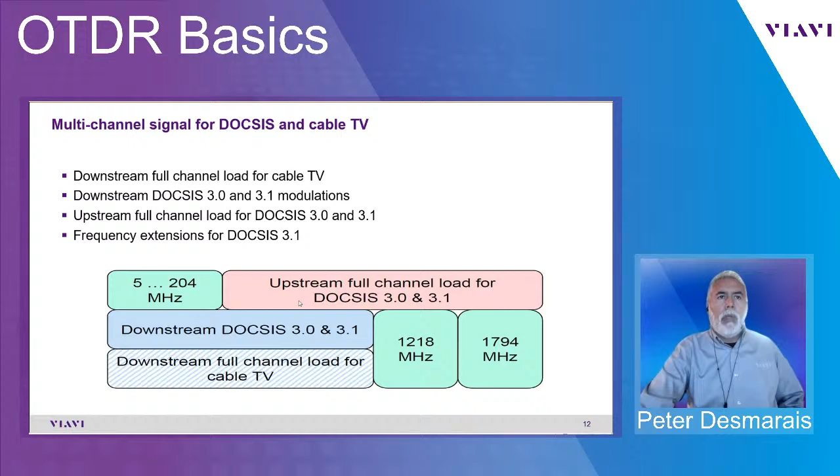Here's just an example of the downstream. When we look at the downstream, for example, we could see DOCSIS. We went from analog to digital, and from digital to single QAM carriers, as well as OFDM carriers. And now I am starting to work with systems who are deploying nothing but DOCSIS carriers and no more digital video carriers. So the network will vary based on what they've deployed.

As well as for the upstream. We went from, for example, single QAM carriers to carriers used for the set-top boxes, as well as to the deployment of an OFDM carrier, including the exclusion zones. So the systems will vary in bandwidth on the upstream as well as the downstream, as well as the variations of all the different types of carriers that we may be utilizing.

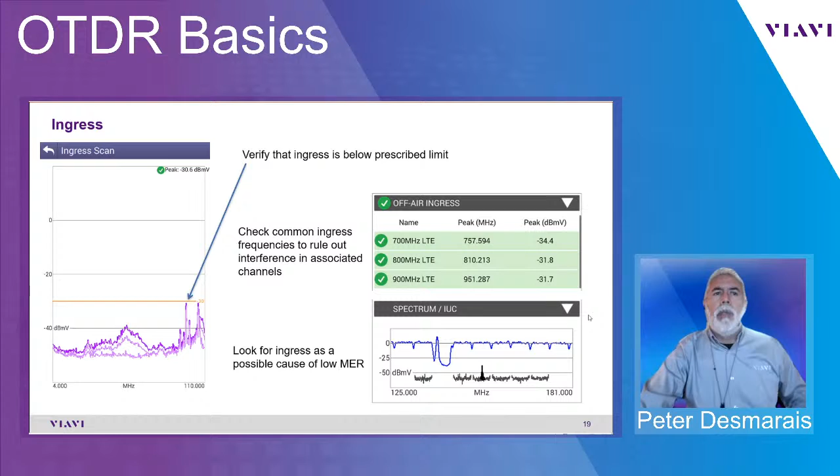So for DOCSIS 3.0, what we can do is a One Check. The One Check is one test that automatically verifies the upstream ingress, again, at each location, whether the tap, the ground block, or the CPE. We also have an Ingress Expert for the network, so they can verify whether it be at the head end or in the network, at the optical node, or the trunk amplifier, line extender, etc., or the tap.

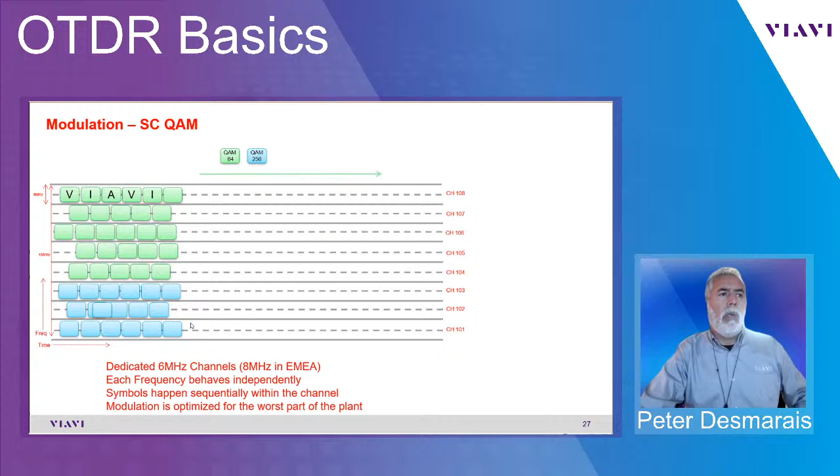As the data comes in on each individual carrier, it's coming in serially. As we went from DOCSIS 2.0 to 3.0, we started combining carriers and sending data, but each carrier is still sending the information serially, on a per carrier basis. In North America, we use 6 megahertz. In Europe, they use an 8 megahertz carrier. Each frequency behaves independently. In this example, they could be all 256, or a combination of 256 and 64 QAM carriers. It is backwards compatible, but it's basically the delivery of the information.

Here's an example of a single QAM carrier, with ingress and with no ingress. This is what we want: great dynamic range. You can see the difference in an OFDM carrier, and on an upstream when we have a single QAM carrier and an OFDMA carrier with an exclusion zone. We overlay the set-top box in this example, so you can see the difference between a single QAM carrier and an OFDM carrier.

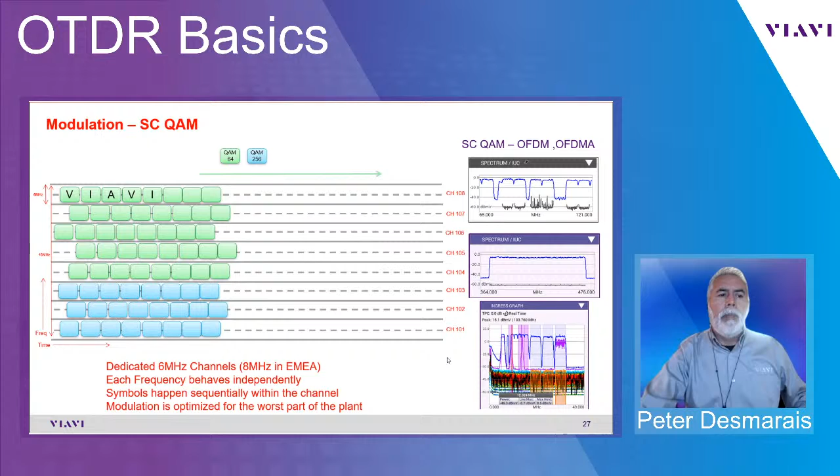So when we talk about the modulation and separation of every subcarrier, for example, instead of being 6 megahertz, the system can either be 25 or 50 kilohertz subcarrier spacing. Again, the bandwidth of the carrier can vary. Most systems deployed initially a 92 meg carrier, 96 meg carrier, and then they went up higher in bandwidth, but it can be all the way up to 192 megahertz.

So in this example, we see how each individual subcarrier can have different types of modulation to carry the actual data. So this example is really just one symbol, or a group of subcarriers to deliver the content, and then the next carrier and the next group of carriers. As each individual subcarrier is delivering the data, it can be changing in modulation, and that modulation can possibly be between 64 and 256 QAM, 1K, 4K modulation.

All right. So this example here has the spacing set to 25 kilohertz. Most systems in North America deployed a 50 kilohertz spacing of these subcarriers. Now they could deploy at 25 kilohertz, therefore we'll have more subcarriers and therefore higher performance as well. So for right now, in most systems in North America, the spacing is at 50 kilohertz.

All right. The demodulation is an FFT, fast Fourier transform. Based on the time, synchronization is very critical. So this is the reason why we want to verify linear distortions and those type of things that can impact an FFT. We also want to verify code word errors.

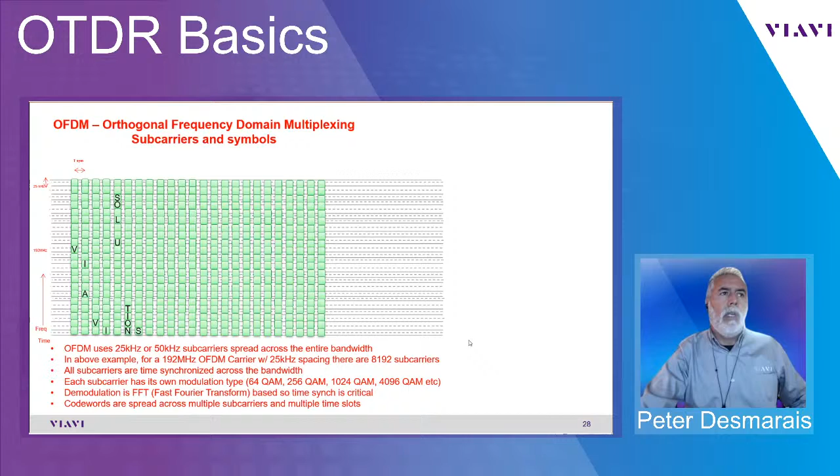So one of the things that's going to change, instead of looking at MER and BER, for example, from a code word perspective, since we're looking at so many carriers being deployed, we can have ingress and noise and linear distortions and other things affecting code word errors at each group. So we have to be able to verify code word errors across this entire symbol rate. That changes as opposed to a single QAM carrier where we verify MER across only 6 megahertz.

So here's an example of this. This will make more sense later as we go through it. When we look at a single QAM carrier, we look at level, MER, pre and post BER, right? But when we look at an OFDM carrier, we have to be able to look at code word errors. And code word errors start at the lower part of the frequency band. So if you remember, this is the lower part of the frequency band, where ingress noise can impact this, and then they populate upward in frequency.

The next code word pointer starts at the higher frequencies and populates downward. So in this example, if we have noise or ingress, they can impact the ability to lock into the next code word pointer. So you have to verify this. That's the reason we have the ability to look for ingress underneath the carriers themselves. So this is an example of how the data is being populated. On a subcarrier basis, we're actually demodulating the entire broadband for you to look for those types of distortions.

Okay, so modulation can vary with an OFDM carrier, right? So we can't just have all of the subcarriers broadcast at one time. So what we do is stagger the information. You can see how the phase changes. One group of subcarriers comes in, the next group of subcarriers comes in, and then the next group and the next group in order to deliver that.

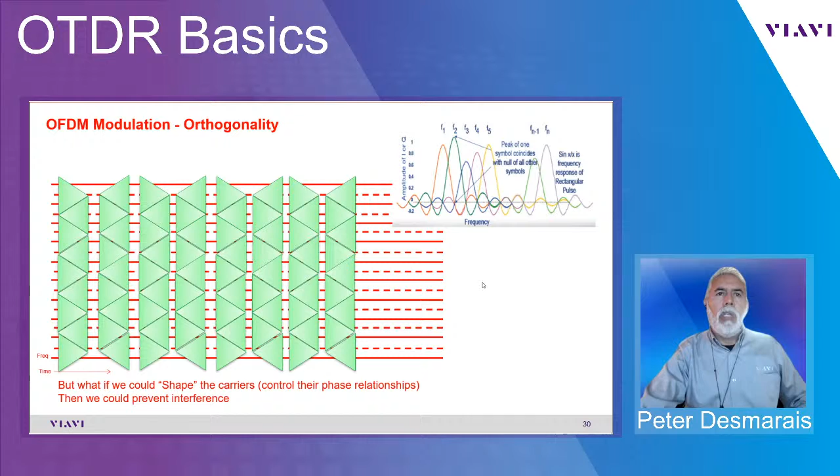All right, so another thing in an OFDM carrier is what we call exclusions. Exclusions are sometimes what happens when we have all of the subcarriers. We may have various different anomalies. Sometimes some systems deploy an OFDM carrier in the LTE band and those type of things. So you can actually have what they call exclusion zones. This is different than what we had in a single QAM carrier.

Right? Here's an example. Sometimes maybe you have anomalies, or maybe you have a carrier. Some systems out here in North America do have a specific channel and they can't move it, so they need to create exclusions to basically format the OFDM carrier around a specific carrier that they cannot delete because they have legacy equipment out and they cannot remove that legacy carrier itself. So exclusions are being used on the downstream, and exclusions are certainly being used on the upstream as well.

So this is why I'm basically nulling the subcarriers and not sending any data on these type of carriers in order to make sure we do not affect any other services, or maybe you have excessive ingress, those type of things. But in most cases, it's due to a legacy carrier that is being utilized at that particular frequency.

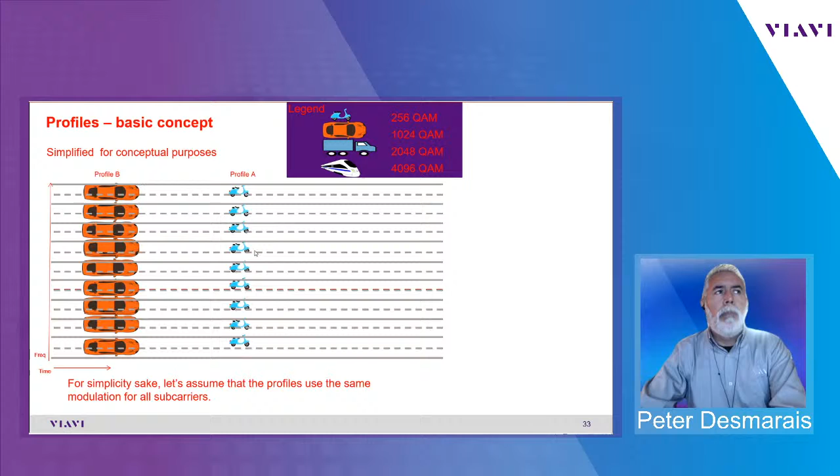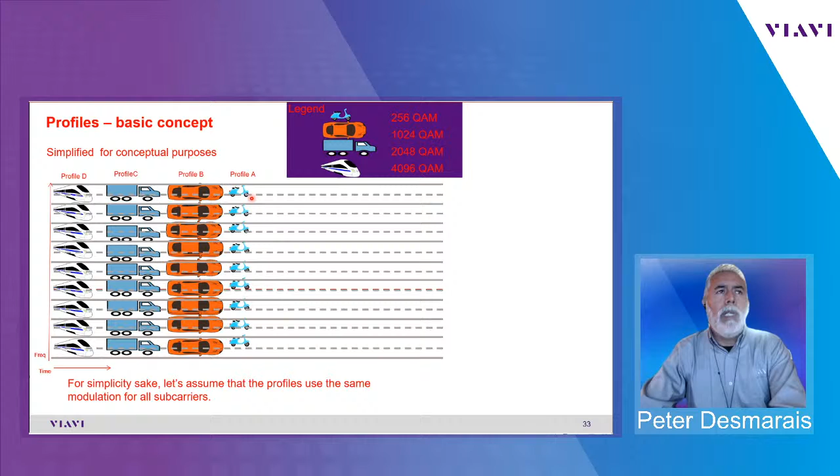The next example is the B profile, and then the Charlie profile, and then the Delta profile. You can see the different types of modulation that we're using. So in this real basic example, the entire A profile is basically at 256. It could be 64 QAM, it could be 256, it could be 16 QAM. There are variations.

And then the B profile, the Charlie, and the Delta profile can increase the bandwidth, or I should say, increase the modulation. Therefore, in the same location where you broadcast a 256 QAM, now all of a sudden it's being broadcast a 4K QAM, and this is what's changing the dynamics. We couldn't do that with a traditional single QAM carrier.

We can't just go back, deploy it in a downstream 64 and go back to 256 and go back and forth. Set-top boxes and cable modems are not used to this ability, but in the OFDM world, we have this ability to switch on the fly. Each individual carrier can meet that type of modulation required. So there's a constant communication between the CMTS and the modem to see if there's any problem deploying.

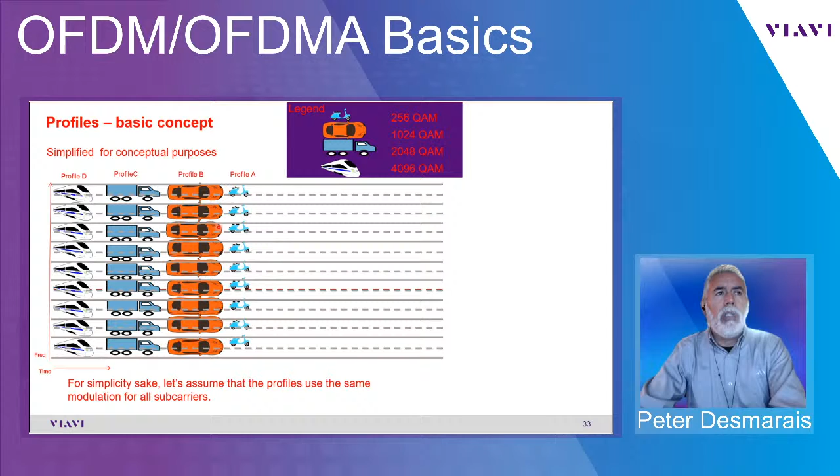If my understanding is correct, Dave, correct me if I'm wrong, you can have up to 16 profiles delivered to that. Most systems in North America deployed about 2 to 3 profiles, maybe some deploy 4, but there are variations, and that profile can vary with different types of modulation.

Okay, so again, this is an example of us helping with the ONX and showing you the max modulation. We show you the A and the B profile, and we'll talk about the next codeword pointer as we go forward. But this is the max modulation, meaning that this is the max modulation that they're deploying at that profile, and therefore it could be lower as well. All right. Usually it's common to have the Charlie or the Delta profiles deploy 4K modulation.

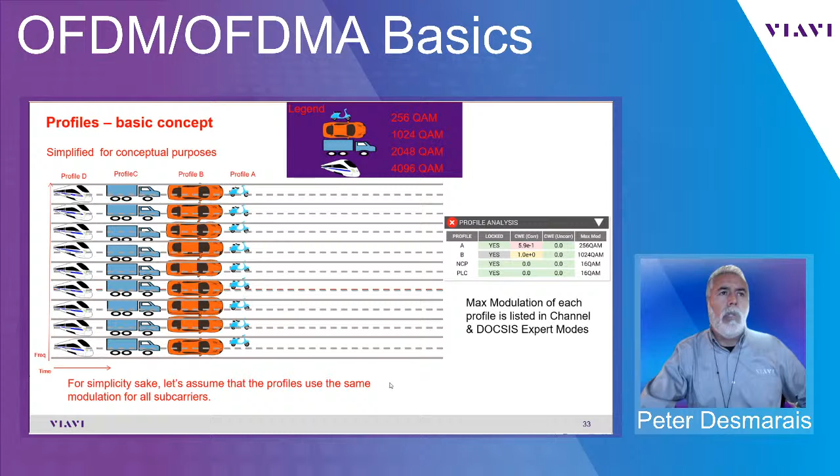Some systems increase the bandwidth of the carrier. Instead of having a 96, they'll do 110 meg, and they'll just do 2K modulation across the band and not deal with 4K, depending on the types of problems the network has in the area, etc. So there's a lot of latitude for networks to deploy various types of modulations and bandwidths and profiles.

So testing the building blocks of an OFDM carrier, so we can understand which are the blocks that we need to test for, and why we need to test each category. A lot of times when I'm doing these types of trainings, people say, well, why is the PLC so important? Why isn't level and power important? Well, we'll see that the difference is because of the type of modulation that we're seeing. So the first example is the PLC, known as the PHY link channel, which contains the critical signal decoding information, right? So this is really important.

If I cannot detect this carrier due to linear distortions or excessive noise at that particular frequency, I won't be able to get the rest of this upper part of the requirements, like the next code pointer, right? The next code pointer tells the modem which code words are present in which profile to find each code word coordinate.

So if I was to go back a couple slides, and we were talking about all the symbols and going at each individual, all these code words are broken down into different areas. So the next code word pointer tells exactly where that group of traffic of code words are for that particular modem. So this is very, very important.

The A profile is the boot profile. It's kind of like booting up your PC and identifying all of the others, kind of like keyboard and mouse, et cetera. So it's very, very important to capture this information as well. All systems must be able to use the A profile. All right. Variable bit loading is available to all of these that we talked about earlier.

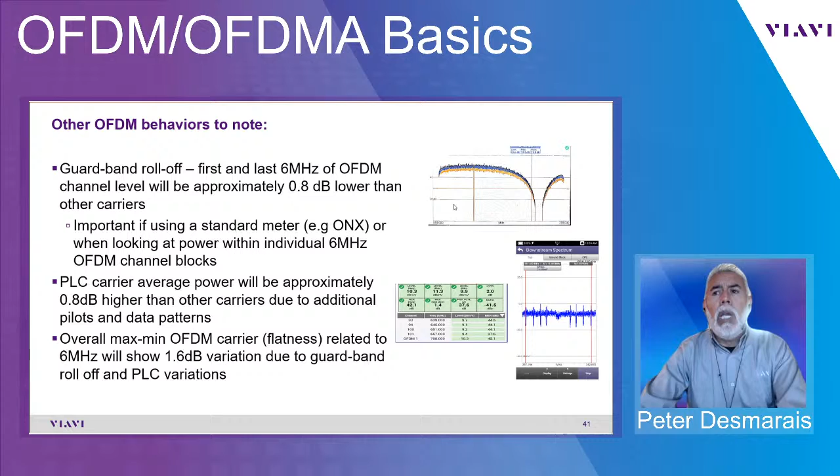Again, the guard band, other behaviors to look at. Here's the guard band, for example, right? So the guard band is up here. If we look at the carrier of an OFDM carrier, and then for systems that deploy exclusion zones, you can see exactly what happens to all of the subcarriers. They drop not only in level, but they drop in MER and those type of things. So you may have to change your parameters for passing or failing your exclusion.

If you remember, we looked at 2%. You wouldn't be able to use 2% here because of what's going on with exclusion zones. So if using the standard on the ONX, make sure that the settings are set for passing or failing. The PLC is 0.8 dB higher than the other subcarriers in the carrier due to the additional pilots, so what they're saying here is that the amplitude is increased because of the subcarriers.

This is an example of using the ONX on the spectrum, looking at the subcarriers, you can see the amplitude. So in this portion of the spectrum, when we look at the actual power of the measurement itself, it's going to increase in power, and therefore there's a difference in power across the 192 megahertz carrier.

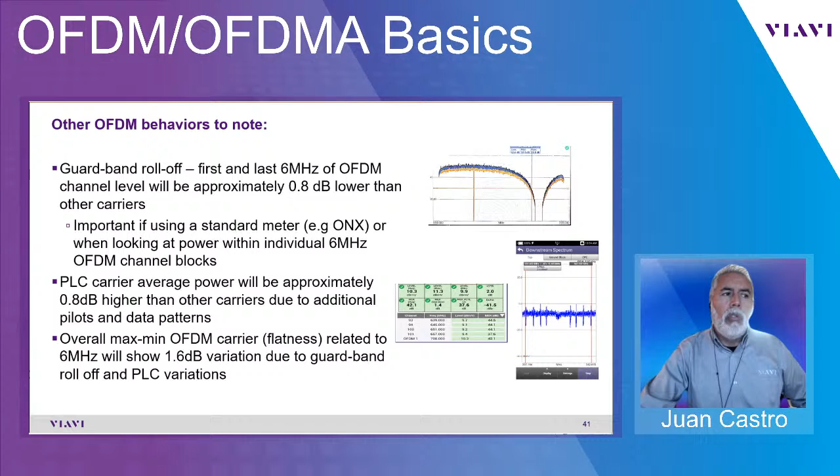All right. From a flatness perspective, again, depending on the exclusion zones and no exclusion, those type of things, we want to verify the ICFR of the carrier itself as well, right? We verify this on a single QAM carrier, but across a 192 megahertz carrier, we're taking the worst case scenario of 6 megahertz, for example, right? Or if we average the power of 1.6. So again, that's what we're looking at right there. The worst case scenario, since we're breaking the OFDM carrier on the downstream to 6 megahertz response.

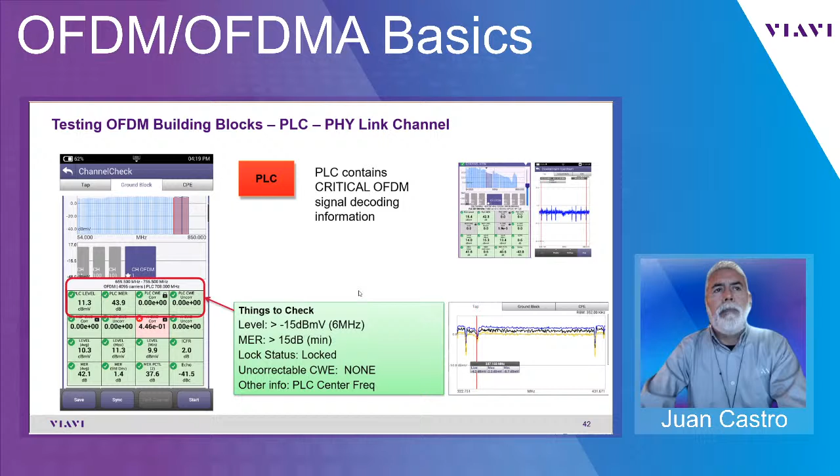The next up here is the next codeword pointer. Again, the next codeword pointer. We want to verify correctable and uncorrectable. Remember, the next codeword pointer starts at the upper part of the frequency, and they populate downward, right? Codewords start at the lower part of the frequency, and they populate upward. So again, we want to make sure that we have no uncorrectable, and we want to make sure we have a lock status. Because of time, again, this will vary. It's just an example of that.

Again, we want to verify because we look at it right out here and we bring that information out again for the next codeword pointer and the PLC. And you can see the type of modulation that we're using. Very robust, right? The next one is the A profile. It's not uncommon to have correctables here, but what we don't want is really any uncorrectables at this point. And it can impact the A profile. This is the boot profile. It's really recommended for all modems to capture that information. You could have errors across all the other profiles as well, and they can be corrected. So again, we want to make sure that we're locked into that.

The next thing we have is the level average. Since the carrier can be 192 megahertz wide, we have to average that over 6 meg. So we have a maximum, we have an average, and we have a minimum power level. So again, generally the level recommended for this is greater than -6, right? And the reason for that is that if the level starts to drop, just like we did with single QAM carriers, the performance will become lower, and we won't be able to meet the requirements for both level and MER in order to receive 1K or 2K or 4K type of modulation.

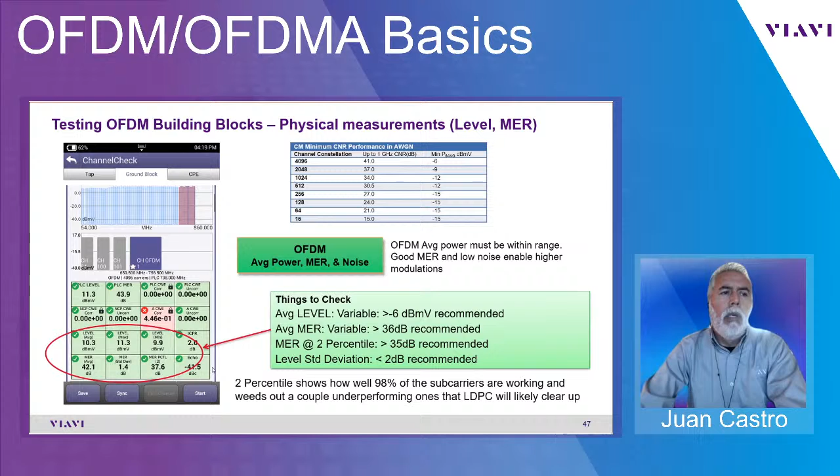Other things that we want to look at is when we verify the tap and the ground block. Just an example: if the tap and the profiles are working accordingly, and then we move on to the ground block and there's some type of noise, ingress or level problems, you can start to see, as we go from the ground block to the CPE, that we start to lose the profiles, and therefore the ability to do the throughput that is required for that customer. This is really no different when we do the actual network itself.

So the profiles are very important to look at to make sure that we are capturing the data and that we have no uncorrectables. Once we move into uncorrectables, the data may have to be rebroadcast again. And if that continues, you may start to lose the profiles as you move from one point to the next, whether in the network, from the tap to the ground block, or the CPE.

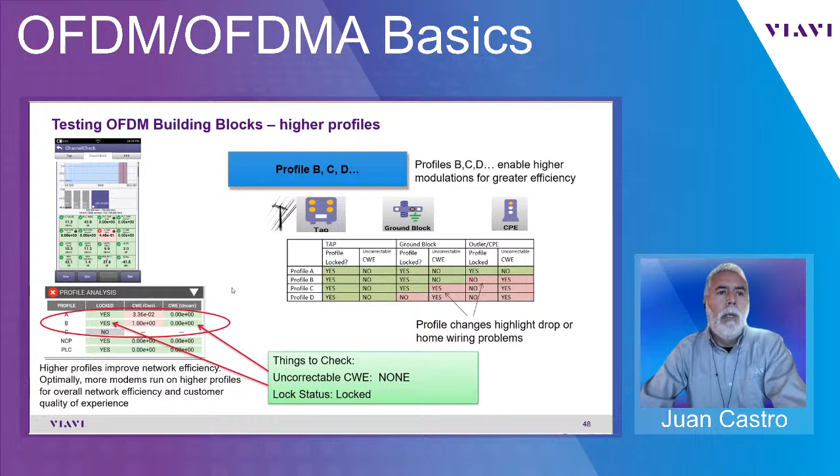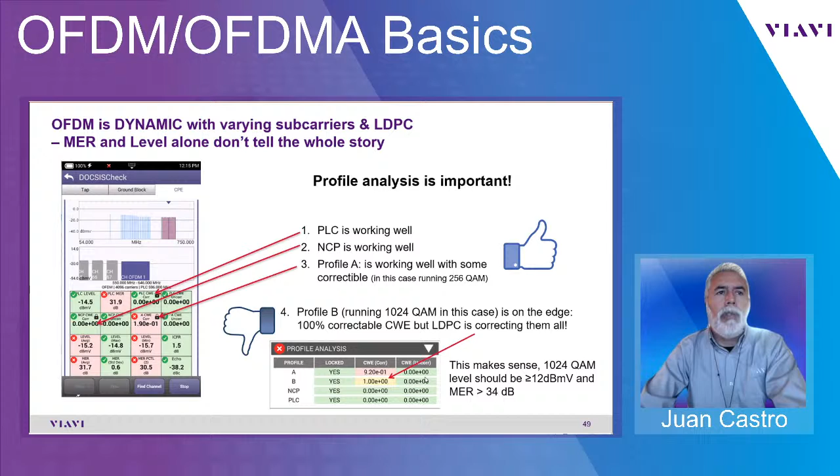So again, very quick: green pass, red fail. Look at the PLC, look at all of the information that we just talked about, and make sure that we have no uncorrectables in order to support the different profiles for the different types of modulations. Again, verify that there is no ingress based on all the different profiles, and remember how it starts profiling from the low end frequency to the high, and from the high frequency to the lower frequency. So always look for the roll-offs and suck-outs and any ingress affecting that particular carrier.

Again, here's everything that we've covered today and what's expected for each part of the building block: the PLC, the next codeword pointer, the profile ID, the average power, and the profiles themselves.

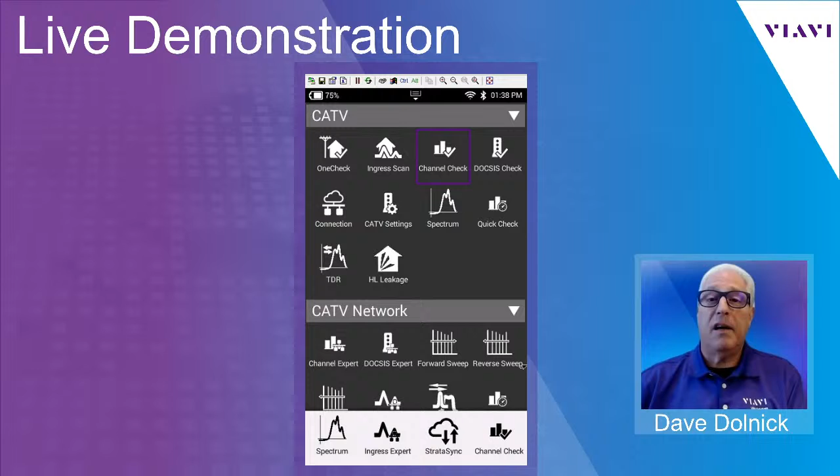So I'm going to go into the channel check application over here. As we just verified, we had signal connected there. That's why I was looking at the spectrum. So I will launch this application over here. And like all good demos, it always takes a minute or two to start.

I'm going to create a new work order ID. And today I'm just going to use something very simple like test new. All right, so I will hit enter on my meter over here to create that new job. So it clears the results of the previous measurements over here. And I will start the measurement over here on my meter. So the CPE is the wall outlet, which feeds normally my set-top box and actually a 1682 ERS router as well.

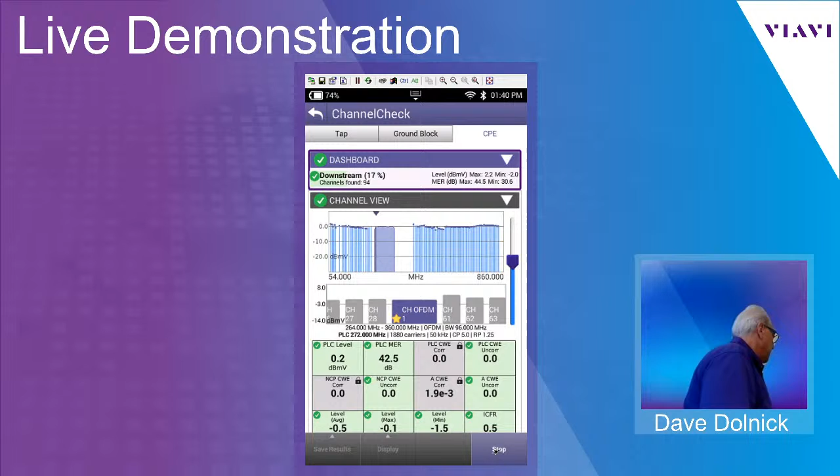David, if you have any questions, if they're pertinent, while this thing is making measurements here, I'd be happy to answer any of those. Yeah, we have a question again from Craig Stanziano. Which attributes of the HFC is the most critical to achieving maximum throughput? Minimize trunk coaxial run lengths, limit amplifier cascades, or ingress? Noise, ingress.

Everything that affects copper plants, it really doesn't matter truly what the payload is, whether it's analog, black and white television, or it's OFDM or whatever we come up with in the future. As long as we have an HFC plant, meaning that we have copper in the plant, we're still going to be exposed to things like radial cracks in the cable, splices that go bad, loose connection points that allow noise to backfeed and ingress into the network. And when it happens, of course, that reduces our separation of the noise floor. Ultimately, that affects the MER.

And when you have reduced MER, that limits the type of services that I can deploy in that part of the spectrum. Certainly very applicable to the OFDM channel. And that's the one thing we need to think about, because as we deploy OFDM in different parts of the spectrum within our network, we have to look at the effects that those off-air service carriers may inject and create issues with quality of service.

So now, looking at this live measurement over here, we're not yet at 100%, but we're looking at the OFDM carrier. We can clearly see here, it says that it starts here at 264 megahertz and goes to 360. There was a moment in time up to literally 6 months ago, maybe even less, where the OFDM carrier was at the top part of the spectrum over here, right there in the LTE band, which unfortunately meant that a lot of people in my area simply could not get the higher level of service, that profile C that my operator uses, which is the 4K service. That provides the 1 gig capability into the subscriber's home.

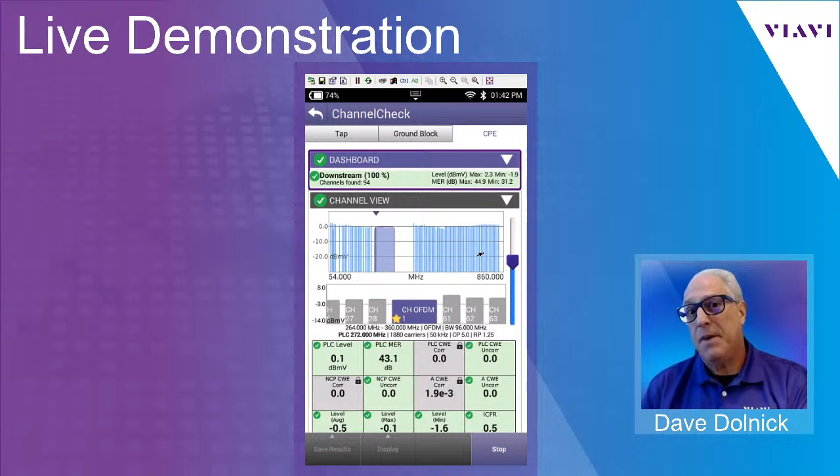So there are different ways of getting around that. We certainly mentioned before the availability to create exclusion zones where we eliminate those off-air cellular carriers from being utilized by the OFDM channel. That's one way of doing it. One of the other things that's important, and this is probably even more important in the upstream of OFDMA, is the profiles that we build.

When we're trying to stick in OFDMA in the upstream in between two active channels, if we're anywhere near an off-air cellular or paging provider that operates within the band of our OFDM channel on the downstream or on the OFDMA channel on the upstream, we have to limit the profiles. If we set the highest level of profiles across all the subcarriers in the part of the spectrum where I have diminished quality of service, meaning a high noise floor, a low MER number, I cannot ever achieve those higher profiles. And that will affect what we actually see when we run throughput tests on the ONX meter. So it's always smart to make sure that we build the profiles correctly. We must always by DOCSIS spec and CableLabs spec build them in ascending order.

So that's the lowest profile, which requires the lowest MER. And as the MER improves, I can request those higher levels of service. If I request a higher level of service right away and I have diminished service quality, things simply aren't going to work. So profile and exclusion zones are very, very important when we talk about building those profiles into the CMTS.

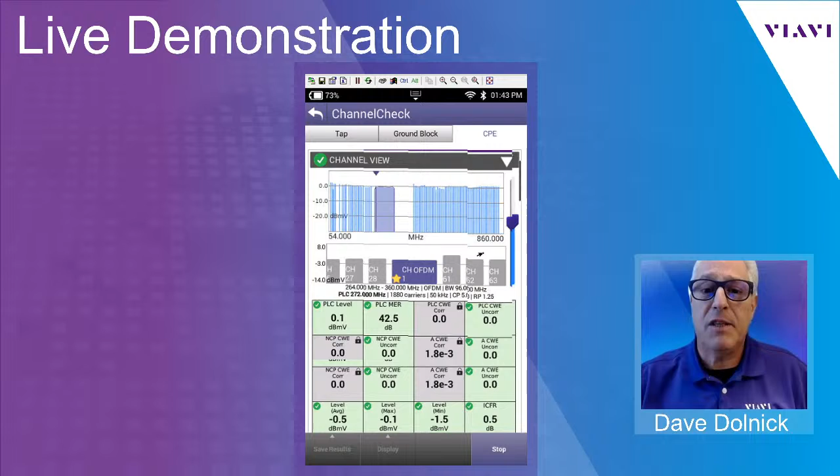So here we're looking at the OFDM channel over here. We see the start and stop of the channel, 264 to 360. So that tells me it's a bandwidth of 96 megahertz, which is a typical bandwidth that I see here in North America. The channels are generally added in 6 megahertz blocks because we measure in 6 megahertz blocks. So if I were going to add more bandwidth to this channel, maybe go to 102 or 108 megahertz, that would simply add more subcarriers for me to utilize.

Now, it tells me here that the PLC is at 272 megahertz. So that's basically 8 megahertz into the input of the channel. And an obvious reason for placing the PLC in the beginning of the channel is as we go higher in frequency, we have greater attenuation on the copper part of the plant. So to make it more robust and easier for the 3.1 device to lock on to the PLC, that physical link channel, or what I like to think of as the primary link channel, because this is the frequency that all 3.1 devices must tune to come online and become active.

So here we see at the PLC an extremely excellent MER off my wall outlet after the splitter and ground block on the side of my home, of 43 dB of MER, just really excellent. Nice low noise floor here. I will also comment that I did all the wiring internal to my home.

All right. I don't know why someone keeps ringing in. I apologize.

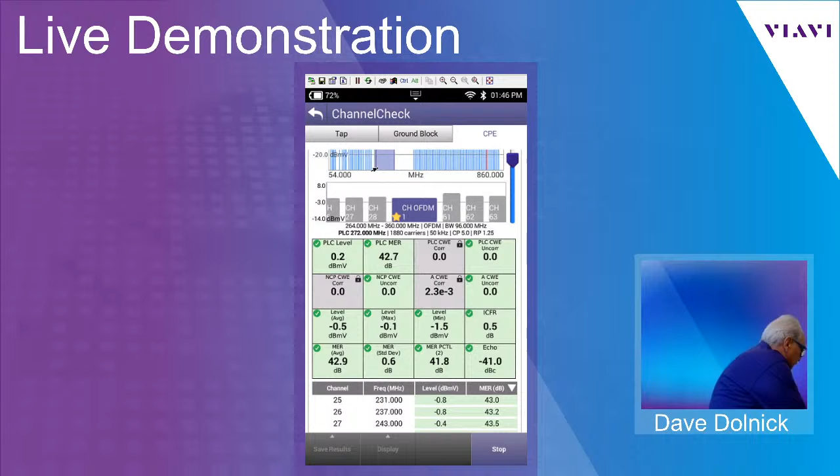Excuse me. Looks like I actually have to do a hard disconnect on my phone. Sorry about that. I apologize for that.

So I was talking about the average power levels across the channel over here. The in-channel response, in my opinion, at a 96 megahertz bandwidth across the channel is probably no greater than 3 dB, where 2 dB is the normal spec for a 6 megahertz channel, including the 6.4 channels coming back on the upstream. Now, average MER is the average across the entire 96 megahertz bandwidth of the channel.

So we're doing good. The MER standard deviation there, it's not bouncing up dramatically. We saw 42.8, 43, 43.1. So we're saying that the MER is deviating by no greater than 0.6 of a dB. The maximum spec is no greater than 2. And of course, if the MER doesn't change much, we can ensure reliable services.

Please remember, MER is affected by thermal noise. So as the copper part of the network heats up over the course of the day, we see those dynamic changes. That's why every couple of seconds we'll see a change in the power level or the MER.

It's simply those thermal noise changes going on in the plant, and or obviously loose connection points, ingress, as that gentleman asked about previously. So the second percentile MER at 41.8, I see it as the minimum MER, but we're saying that 98% of the carriers across that 96 megahertz passband are having an average MER of almost 42 dB. You will also clearly notice it will always be the lowest MER in this measurement here. I kind of look at it as my worst case scenario, or minimum MER.

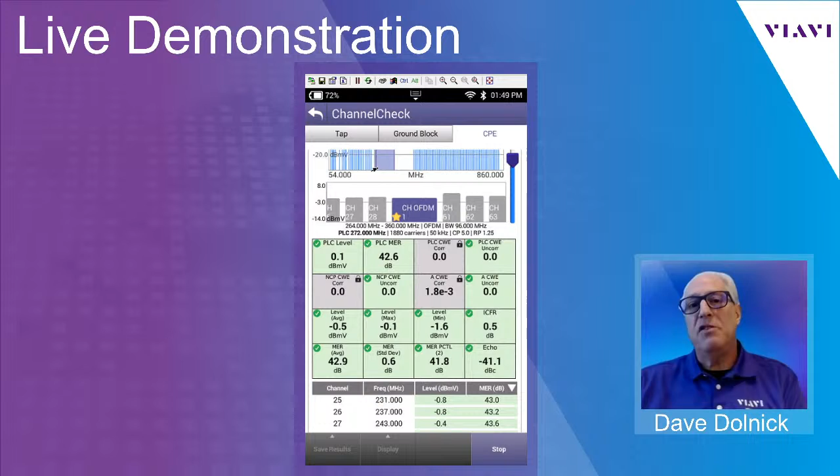So the energy, the echo, has to be at least 25 dB down. dBc is decibel below carrier. So we're much greater than minus 25 dBc. The cable spec, we're at minus 41. So some 16 dB or greater above that. So we're looking pretty good there. So these are just the physical layer measurements that we're viewing here on the ONX meter.

As I page up here, since I'm looking at the OFDM channel, it is showing me, of course, the frequency and level and MER of not only my selected OFDM channel, but also the adjacent channels below me and above me. In my particular instance, as you can clearly see, the next channel above the OFDM is, in fact, my pilot channel, channel 61 and 445.25. So you'll notice that there's an open part of the spectrum here, which will explain what we see when we look at Smart Scan. And of course, since that's an analog pilot over there, there is no MER.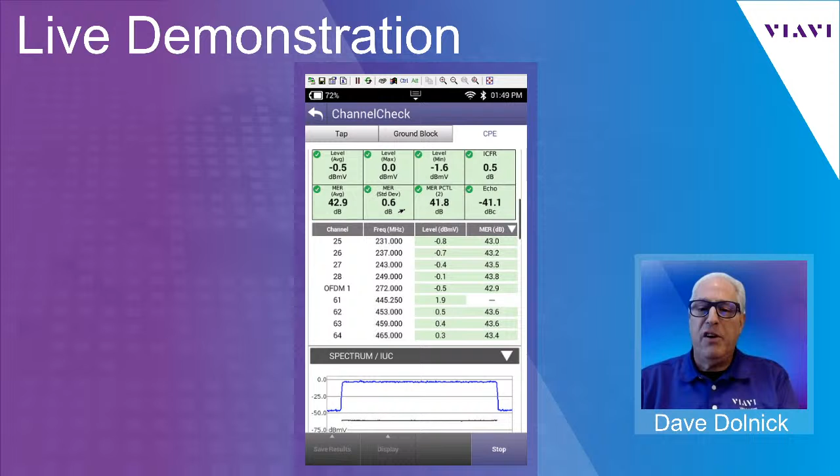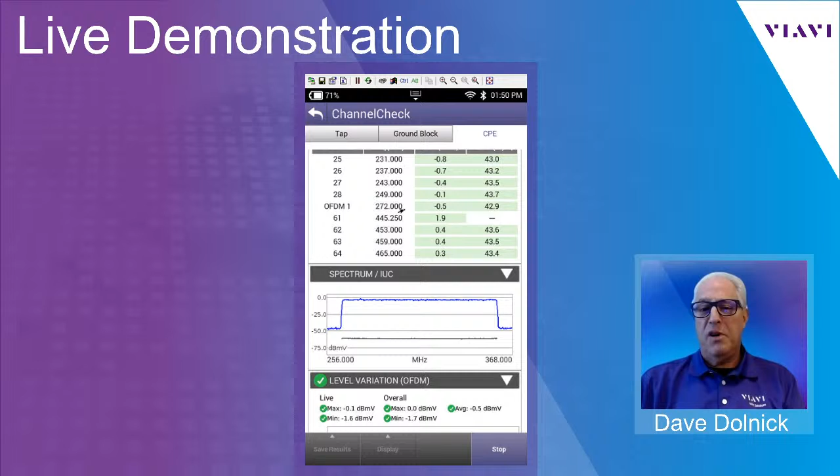So here we're looking at ingress under the channel, which is looking pretty clean over here. Let me just look at profile A. It still looks like we're taking some hits over there, so there must be some sort of reflective energy. Now remember, a spectrum analyzer is looking at the separation between the noise floor and the carrier itself. So I'm seeing the peak energy across the 96 megahertz channel.

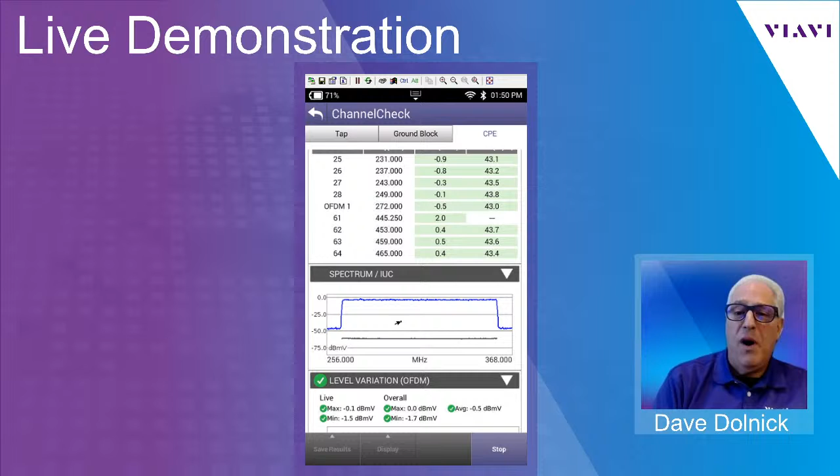Earlier today, we were taking significant hits on profile A, but in the low part of the spectrum here, as Juan had mentioned, where normally my PLC would be, this is where we had an ingress hit. So there doesn't seem to be much of anything going on at this time, and our MERs bear that fact.

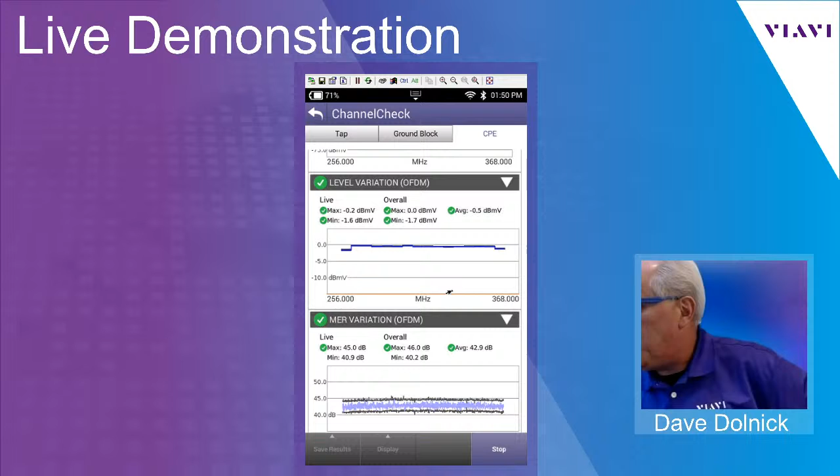So that being said, as I page up here, I see my level over time seems to be very consistent. My MER is staying within that window and always above 40 dB on the low side there, but it's varying within that 6 dB window between min and max, but always above 40, so we're looking good. So that allows me to achieve the different levels of profiles here.

So let me just explain what's going on here when we look at profile analysis. We can clearly see that the PLC and the next code word pointer are both at QAM 16, and that's because I can sustain 10 dB higher noise floor at those lower QAM modulation rates and still be able to lock onto the carriers. As I need to be able to lock onto the PLC to be able to even decode the OFDM channel itself, this is extremely important.

Then in my particular network here, we have our profile A, B, and C in ascending order, as is required for the boxes and devices to work correctly, both in the field and for the meter itself, which has a 3.1 modem. So QAM 256 running at roughly 39 megabits per second, 1024, which can achieve data rates of somewhere around 600 megabits per second, 4096 or QAM 4K can actually do up to 2.2 gigs if so configured. Typically, we use that as our 1.2 gig down guideline for testing service for the 1 gig service we provide to our customers today.

And as Juan had mentioned, we can certainly bond OFDM channels together to dramatically improve that bandwidth into the subscriber's home network. So if we look over here, we see that we have a green lock light on the PLC, the next code word pointer, and profile A. Yet I see the word yes highlighted for profile B and C, but there is no green light on them.

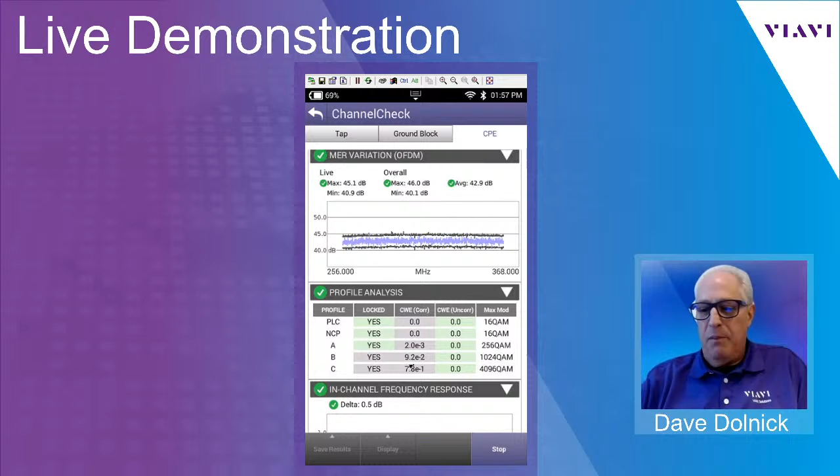We must ensure that we have good service quality both at the optical distribution point where we convert to RF for HFC distribution, as well as making sure it absolutely is correct when we input it into our network. So that means that sometimes we have to clean the fiber shelves and the input to the laser transmitters at those remote head ends or hub locations. So very important concept to understand there.

The in-channel frequency response, why it appears to be a rocky road, the delta between this low point over here and this high point here is only half of a dB. Again, we're looking to be hopefully within a 3 dB window or 2 dB delta to make sure we're seeing flatness here. Now, the rocky road that we're seeing here is simply every 128 subcarriers, we kind of raise the gain of those subcarriers as pilot pointers to make it easier for the 3.1 device to move between those different segments of that OFDM carrier.

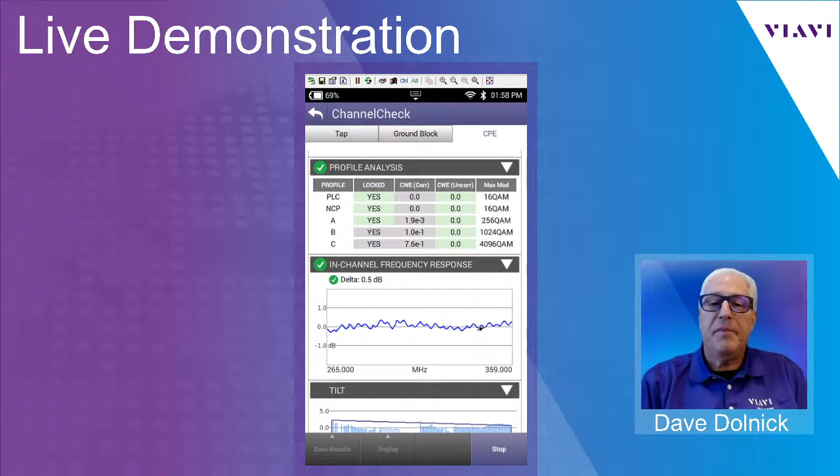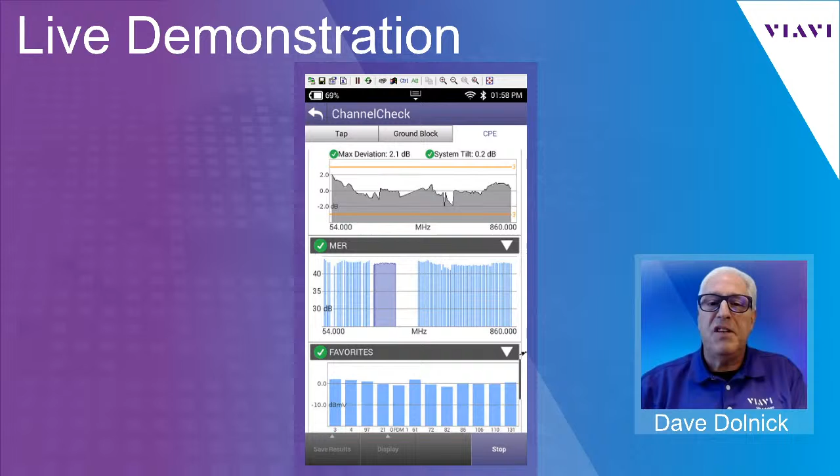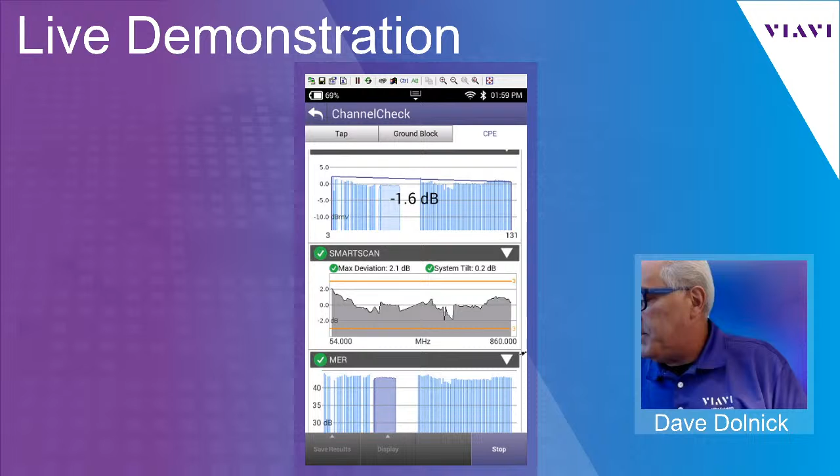Okay, so let us move along here. Okay, so these are just different things. A SmartScan, again, MER across all the channels, our favorite channel data, but it's really the profile data analysis and the physical data that are important for the meter itself. The other thing, while we're on the meter itself, I want to bring up over here, but I'll have to move to a different port, is looking at Ingress Expert.

And the reason why we do this is because we may, in fact, have an OFDMA carrier on the network, although at this moment in time, it is not being utilized, meaning it is being tested, but it is being time shared. It's not bonded as an active service to the upstream channels at this point in time. So I'll see if I can explain what's going on over here. Let me just push up over here on my display.

So one thing, I ran a DOCSIS test prior to our meeting, and we can clearly see that they're running 4 upstream channels over here. And I'll show you here in the Ingress Expert mode, OFDMA running, but it's not an active bonded service. If it were an active bonded service, I would see that as one of the upstream channels here. Now, what I'm trying to demonstrate here is that if it becomes an active service, I will be able to track the upstream SNR as well.

This is an important concept because the profiles that I configure in the OFDMA channel are going to be based upon the SNRs that are available on the network. So it's important to maintain a nice tight network. By the way, this of course is how, if we have a node health issue, we can determine which leg has the highest noise contribution by plugging into each leg in the node itself, and very quickly finding out who has the lowest SNR. So I do not have to pull the return pads and kill the upstream service.

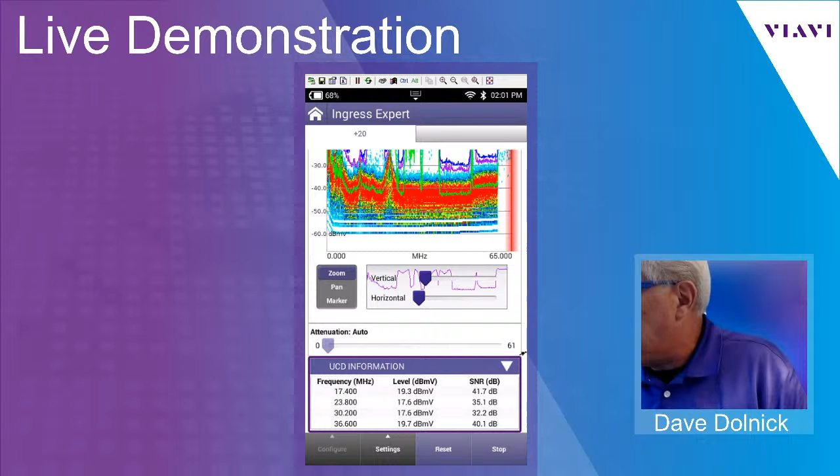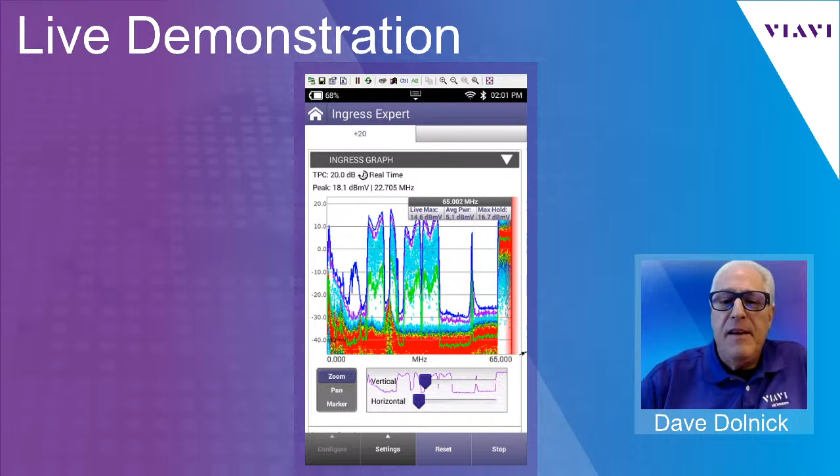Now, as we look over here, let me try and pull this spectrum down. We certainly see the DOCSIS 3.1 services over here. And it looks like OFDMA is not turned on at the moment here. I do apologize for that. We may see it blink on over here, and you'll see it cover across the entire upstream.

Well, I don't see it happening right now. Let me just see one thing, if I can get a closer image of this. Nope, I'm sorry. So OFDMA is not operating. It was up this morning for a session I did. One thing is I do have heat mapping turned on, so it makes this beat here at 22.7 very, very visible. That's the idea of heat mapping. So it makes beats discernibly visible in the return spectrum over here.

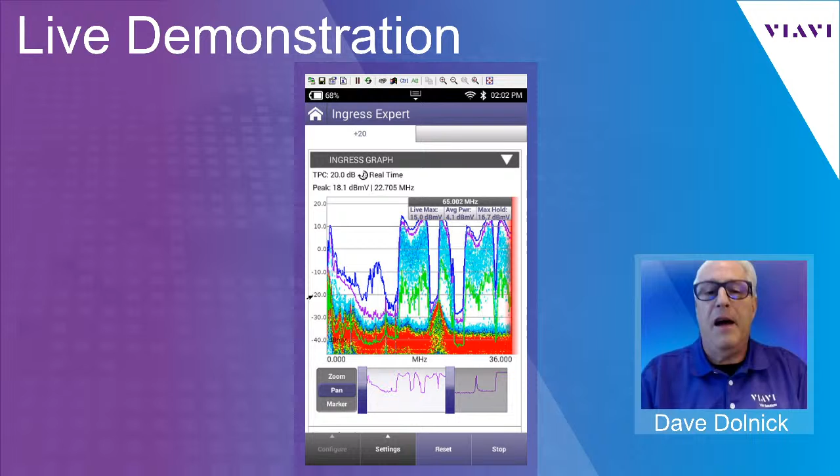All right, let me drop off over here and let me bring up XPERTrak. Now, in our XPERTrak server, we have the ability with XPERTrak to also monitor the DOCSIS 3.1 services coming back as well. So the idea here is that we're looking at node health, if you will, from the best quality nodes to the worst quality return paths coming back on the network over here. So if I click on any particular node that shows a low node health score over here, I can isolate what's going on in the 3.1 world over here.

So what I see going on right now when I look at 3.1 is that I'm able to achieve profile A and profile C. So if I know that there's a profile B, I would certainly expect to see its presence there. But again, depending on how I set those profiles up for those subcarriers, that profile B may be segmented to a part of the carrier where I have a high noise content.

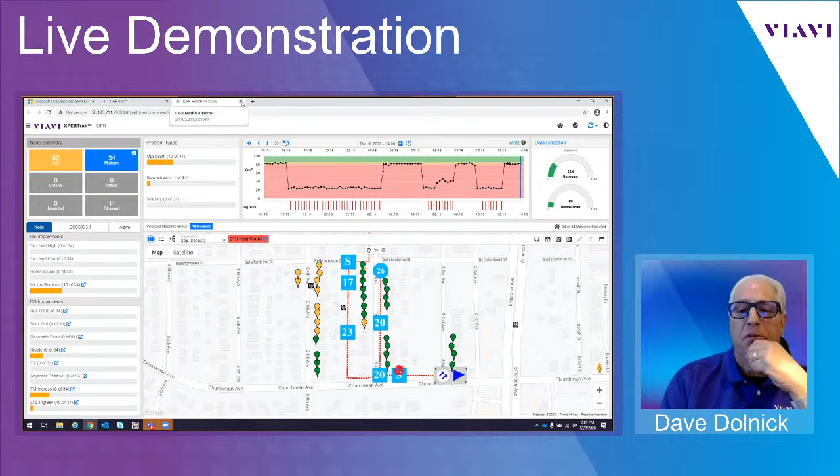So I'm seeing the presence, in the 3.1 world, of the 3.1 boxes over here. So I can certainly click on this and try and do a little bit better isolation as to who 3.1 is amongst all the modems in the path, as opposed to just looking at the node itself. So this is just some of the information I'm able to bring back over here. So let's see if we can find a node that has more 3.1 boxes on there.

So here, profile A, profile B, no profile C. That's problematic, right? Because we want to see our 1 gig service with that profile C over there. So only profile A seems to be working, and we have profile B over here. He seems to be hidden. Select this. I don't see that gray box, but it must be sitting behind one of these. So the idea here is to show that profile. So let's move back once again. Let's look across some other paths over here.

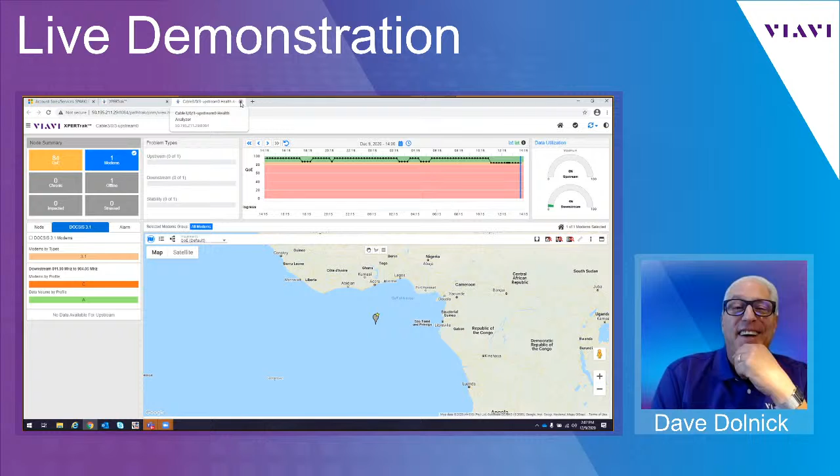The 3.1, 3.0. Whoa, I don't know. That put me into the way wrong area over there. Modems by profile. All right, so that's apparently looking at a node somewhere out of this country, Republic of Congo. So XPERTrak is a far-reaching system. I suspect that's not one we want to look at. Let's look at a CPR, all right? Cisco path over here.

All right, so I see, okay, the different profiles over here. So we're able to track a little bit more information. And the idea here is that if we have an XPERTrak system and we have RPM 3000 cards or the HCU 200s, we're able to look at the OFDM carriers coming back and look at the profiles that are available on the upstream ports of the XPERTrak or the PathTrak system itself.

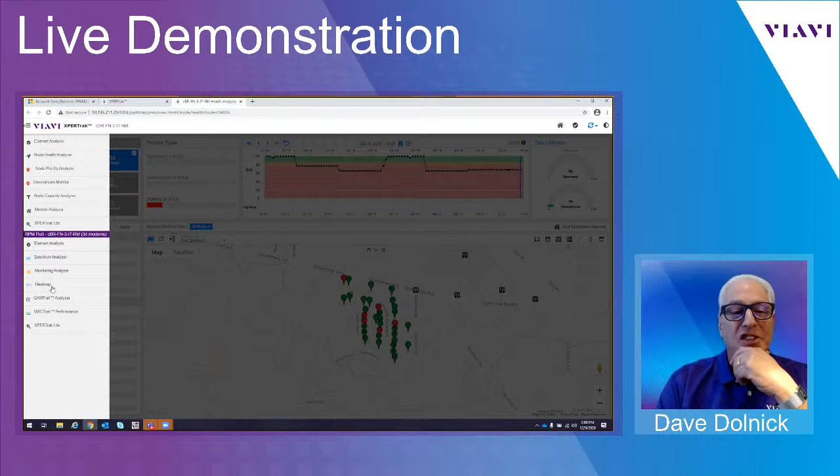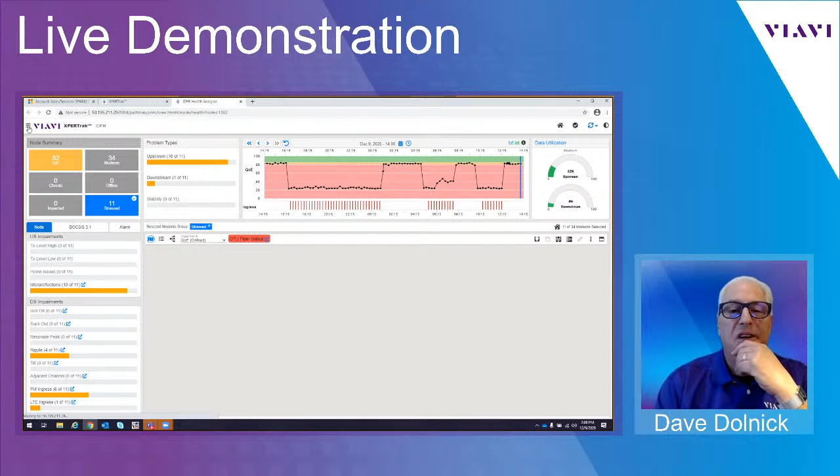And certainly, even if I go into the node information over here, I do have the availability to see what may be causing interference by looking at different things, such as, for example, heat mapping over here. Let's see if we have ingress underneath the channels that may be causing issues with quality of service. Well, actually, I'm not seeing any service on this particular return path. Let's choose a better node. So let's just see what's going on here from a spectral viewpoint. I'll just look at the heat map.

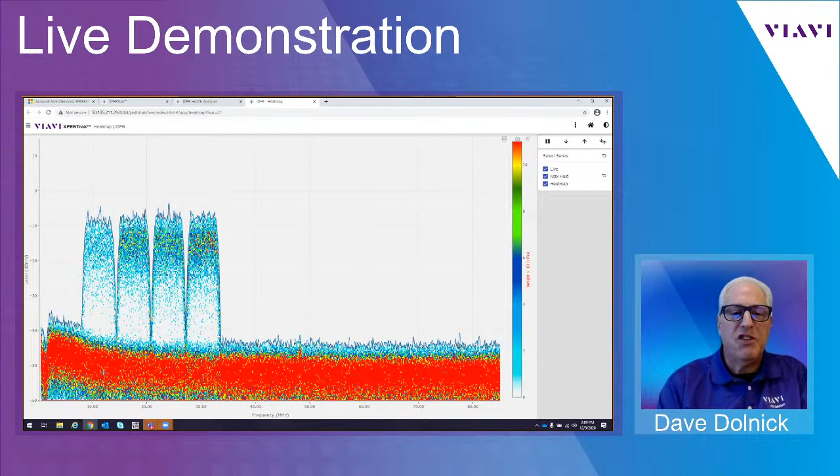So there I see my 4 upstream carriers. There is a slight buildup in the return band over here, probably related to a bit of drop noise, maybe an out-of-band set-top box firing over here. But again, the idea here is to see this buildup of beats or in-band ingress. So this is, again, my noise floor and my heat map. So actually that's looking pretty good.

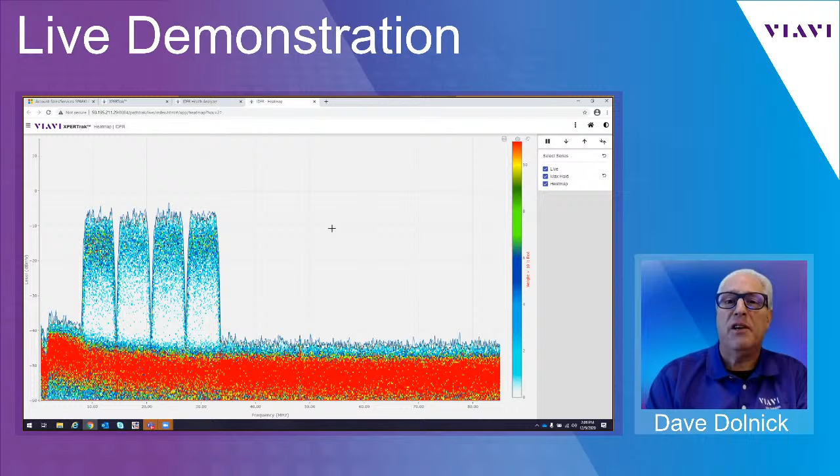We see a lot of active energy here on these 2 channels. That's why we see the higher coloration. It's just more activity or more energy there, so more active traffic being moved to those individual upstream carriers here. So just some of the information we're able to see here. And just looking at the spectrum over here, we'll just take a quick look at that.

So I'll turn on all my different applications: min, max, hold, and average data. And for those of us that are used to using ONX meters, this will probably make a whole lot more sense to you. So when we look at ingress scans, I just had on my ingress expert mode. So in fact, I can just turn off the heat map over there and just bring it up so it looks more like what we would tend to see over here.

But average power level. So what we're looking at over here under average, when I turn on average, I would expect to see energy here underneath the active service channels. What I also notice is out of band, my min energy and my average power level seem to be nice and low. A little bit of buildup over here, probably related to a little bit of drop noise. This is important to me as a plant person to be able to determine whether or not I have a plant-related issue or an install-related issue.

This may make a little bit more sense for those people that are used to using the ONX meter, looking at noise. So if you look over here, and let me just move my pan button back out. Again, we see the same type of scenario over here. We just see active traffic, but the green, or the average power level, was nice and low. And that happens when you have nice tight connections behind the subscriber device.

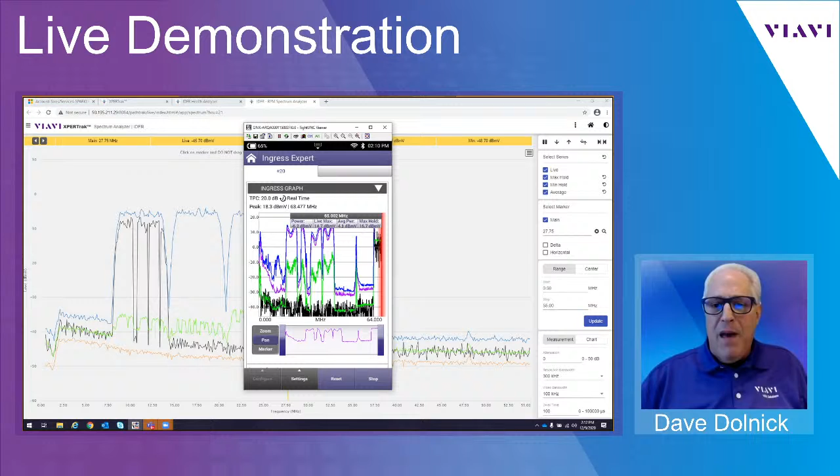So this helps me isolate, which is why I'm looking past 5 to 42. I'm looking at like 65 megahertz, so I can view out of band to see what out of band power is going on in the min over there. And that's why I relate this to what we see over here, and why I look at average power here as well. So those are just some of the tools that we have in PathTrak along with our ONX meter to be able to look at different scenarios within the network.

That's really all I have on my end at this point. Okay, so I just need to stop sharing my screen. There we go. Are you able to see the screen?